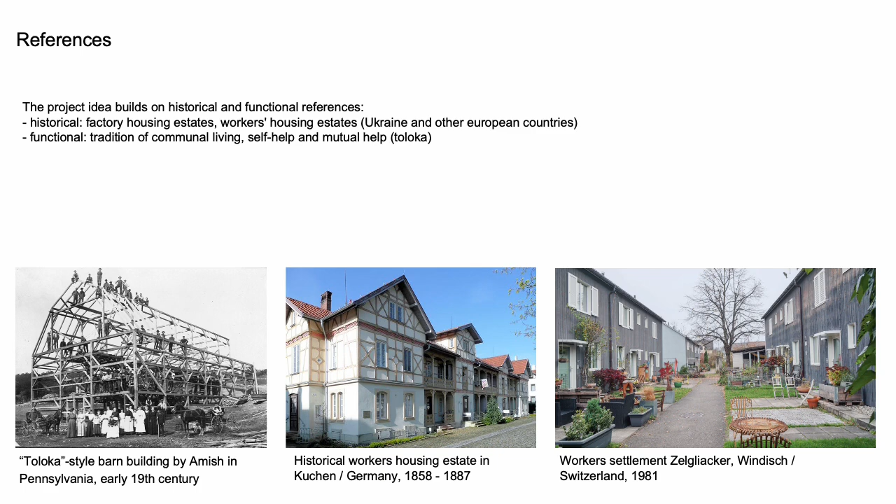There are numerous historical examples of both neighborhood assistance, Toloka, and the typology of the workers' housing estate, which have lost none of their relevance and which can make use of it. A contemporary solution should therefore build on the tried and tested recipes from the past on the one hand, while looking boldly to the future and opening up to new ideas on the other.

The following 5 innovations work together synergetically and go beyond the original goal of planning an ecological workers' housing estate, but are also absolutely necessary for achieving the goals set.

Innovation number 1: The model building as an incubator. Like a working model, it illustrates the material and spatial concept and offers space for future approaches. Future residents can use it as a trial home to experience the advantages of the unfamiliar materials. Their experiences should be scientifically monitored and used to test and further develop the concepts.

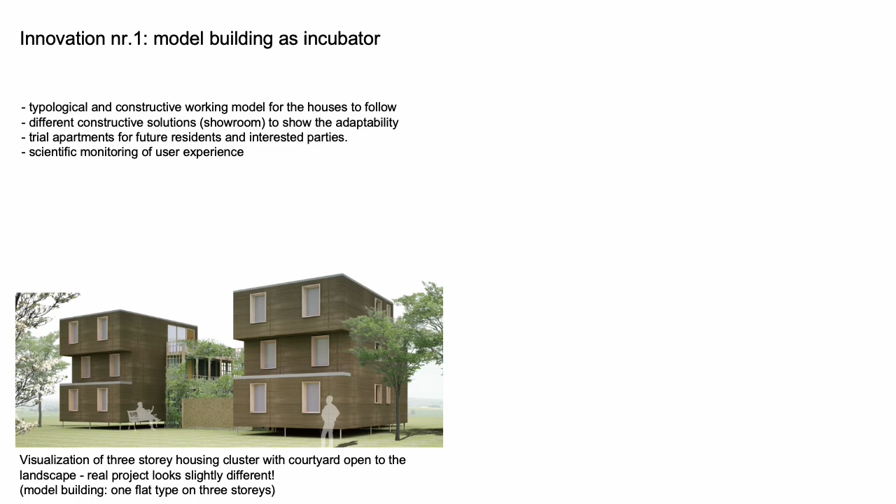Innovation number 2: The materials for the construction of the eco-housing are not to be purchased on the conventional market, but are to be produced from locally available natural resources in a factory or manufactory to be built on site.

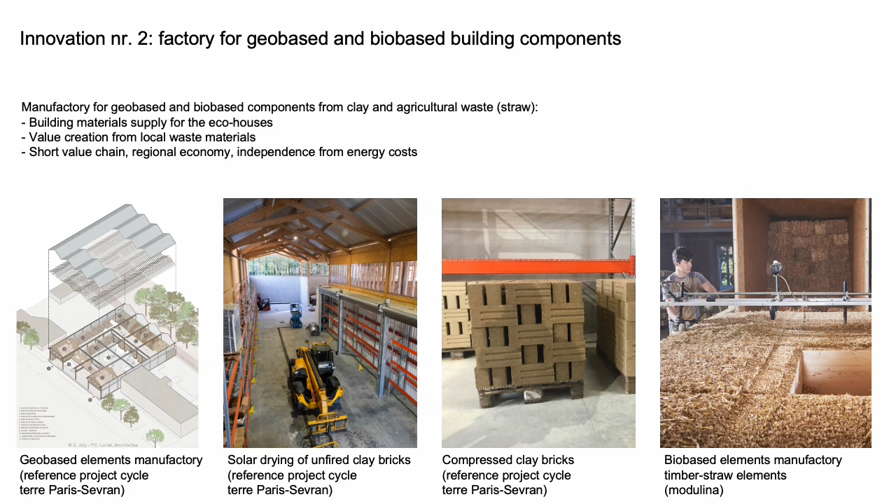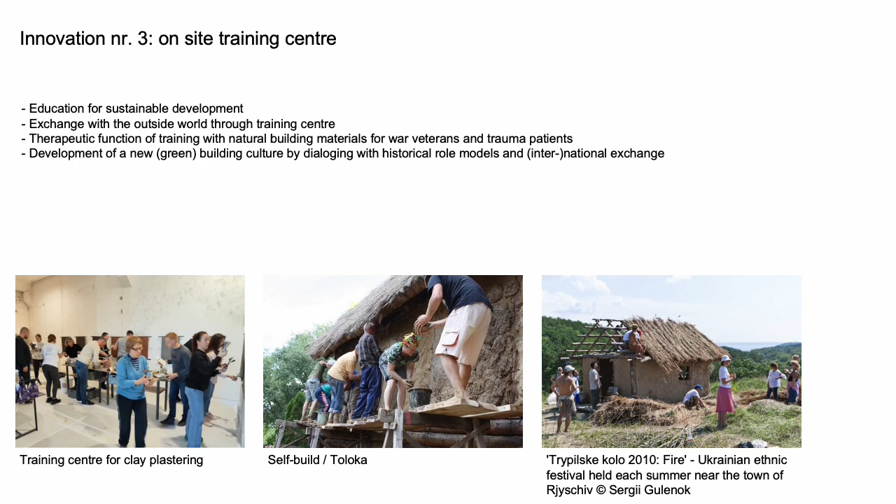Innovation number 3: The handling of the unfamiliar building materials is to be taught in a training center to be created on site for craftsmen, future residents, and other interested parties.

Innovation number 4: When selecting technical solutions, systematic attention is paid to their recyclability and resilience. The reuse of components is practiced in repair workshops and promoted through exchange platforms.

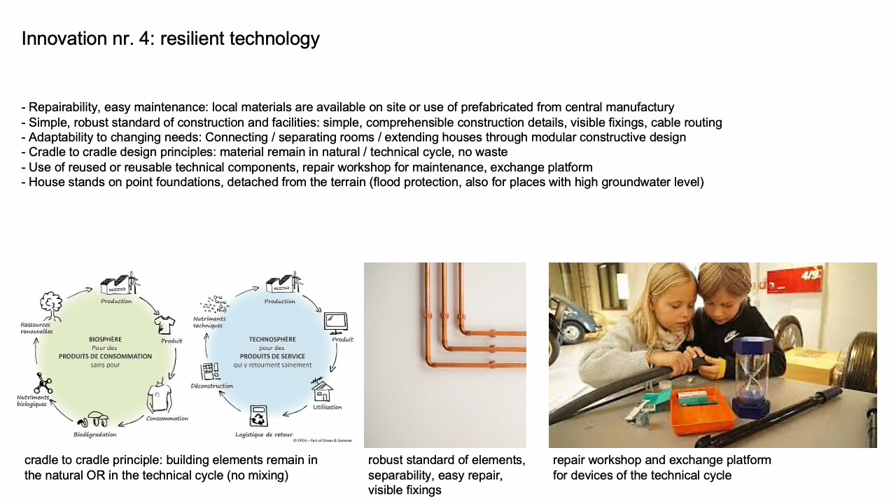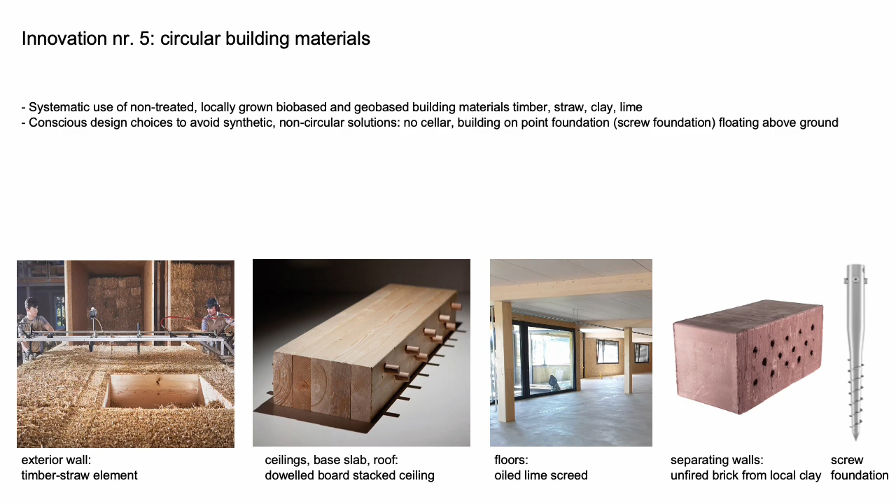Innovation number 5: Conscious design decisions, such as not building a cellar, create the conditions for the consistent use of untreated, locally available and recyclable natural materials.

The architectural and structural concept is designed to be versatile and adaptable to changing needs. The layout of the rooms allows for both social interaction and private retreat. The flats are accessed from the courtyard via the pergolas. Generous room sequences go hand in hand with efficient spatial organization.

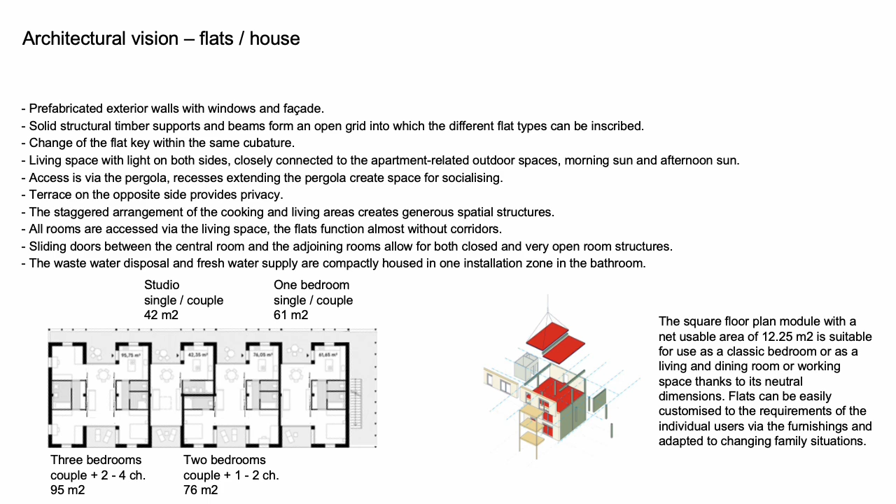3 three-story buildings are arranged around a shared courtyard which is bordered by a single-story communal building. This offers space for the shared use of resources, storage space, laundry room, guest room, workshop, etc., and enables a reduction in the size of the flats without any loss of comfort. This concept also includes a variety of green outdoor spaces for an attractive extension of the living space.

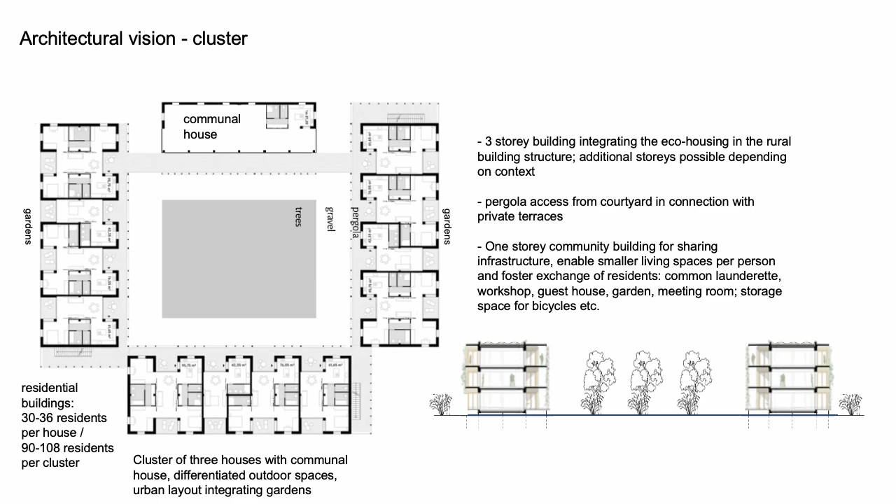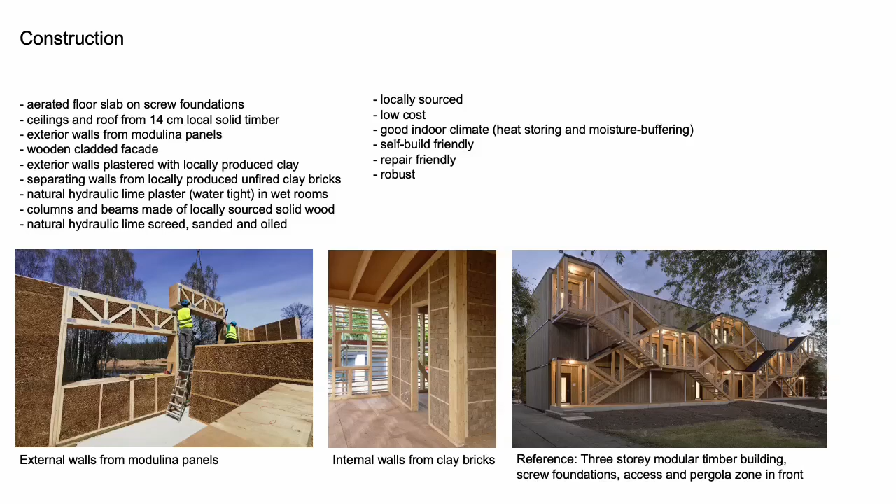Only locally available materials are used for the construction: clay, wood, straw and lime. The construction is cost-effective, easy to build yourself, easy to repair, robust, and it promises a healthy indoor climate and the best possible eco-efficiency. The walls and ceilings are prefabricated and joined together to form a rain-proof building envelope within a very short time.

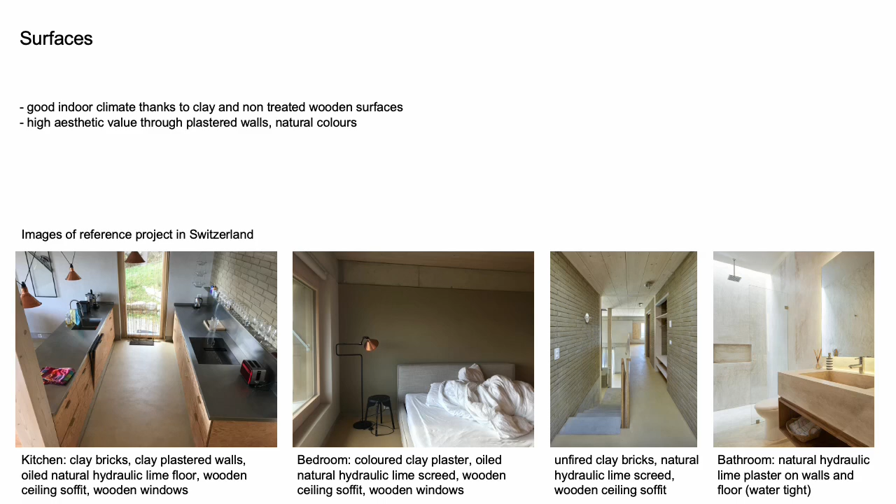The fit-out is carried out in collaboration with the future residents. The largely untreated surfaces made from natural materials are of high aesthetic and craftsmanship quality. They consist exclusively of wood, clay and lime.

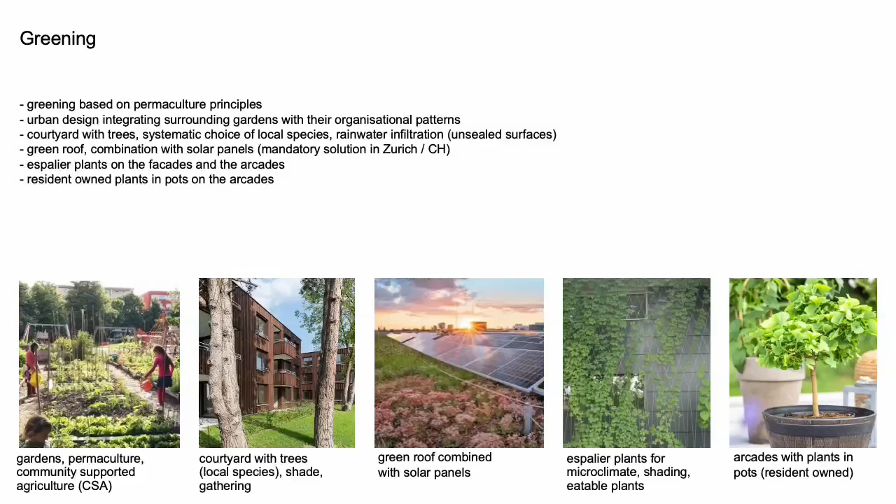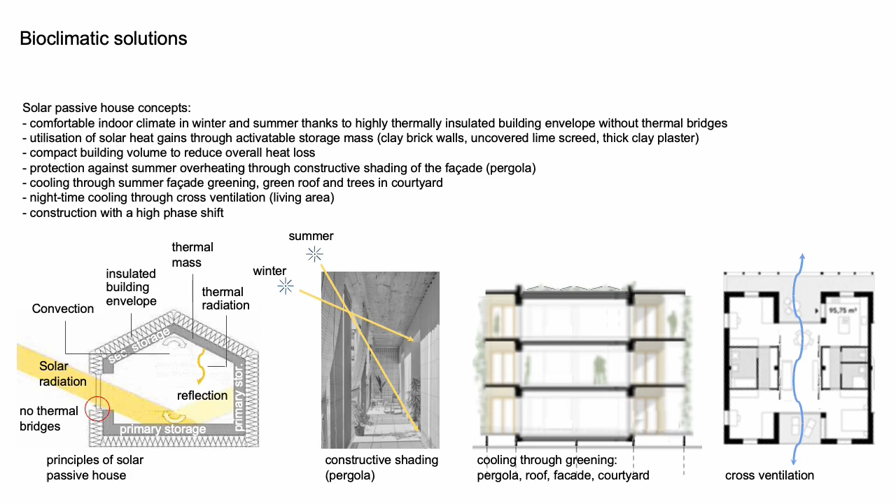The greening fulfills both ecological and social objectives. They are simple, tried and tested solutions with multiple benefits. The bioclimatic architecture and the consistently applied passive solar concepts enable an optimal indoor climate with simple design solutions that support each other.

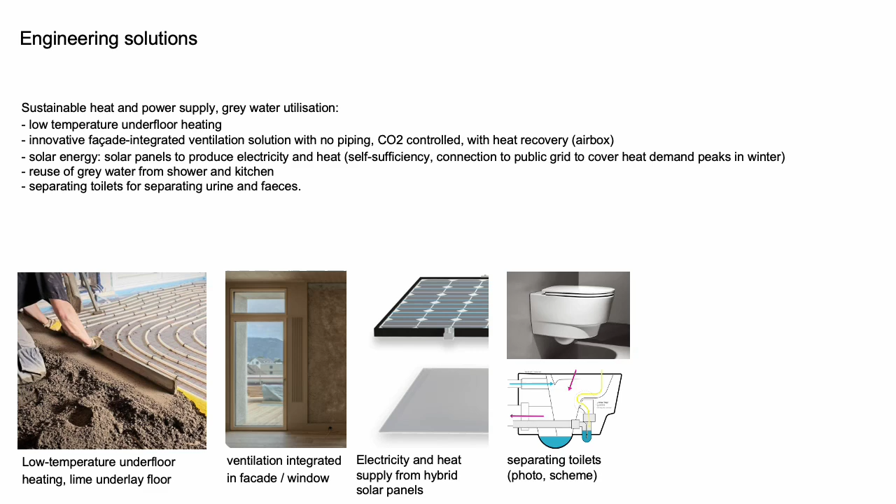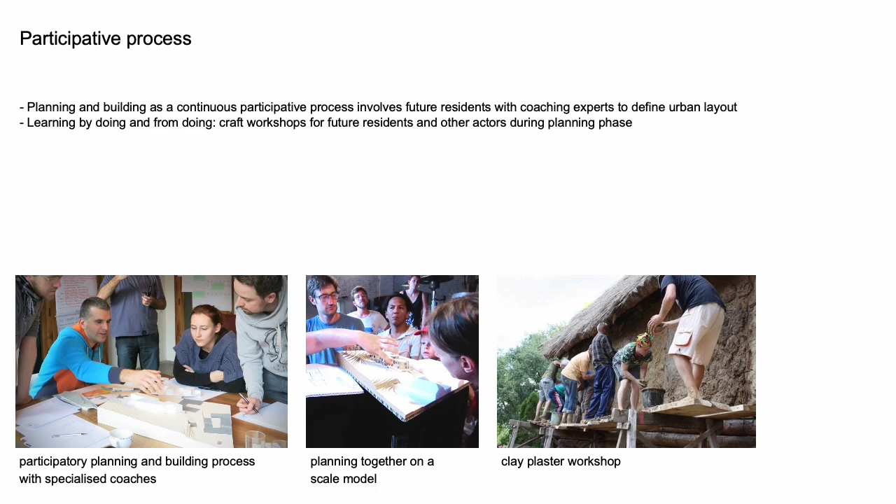The carefully selected and tried and tested solutions for building technology enable the efficient utilization of available resources. The involvement of future residents in the planning and construction process promotes identification with the living space. The exchange between lay people and experts enables mutual learning. Social interaction and the need for privacy are equally supported by the spatial concept.

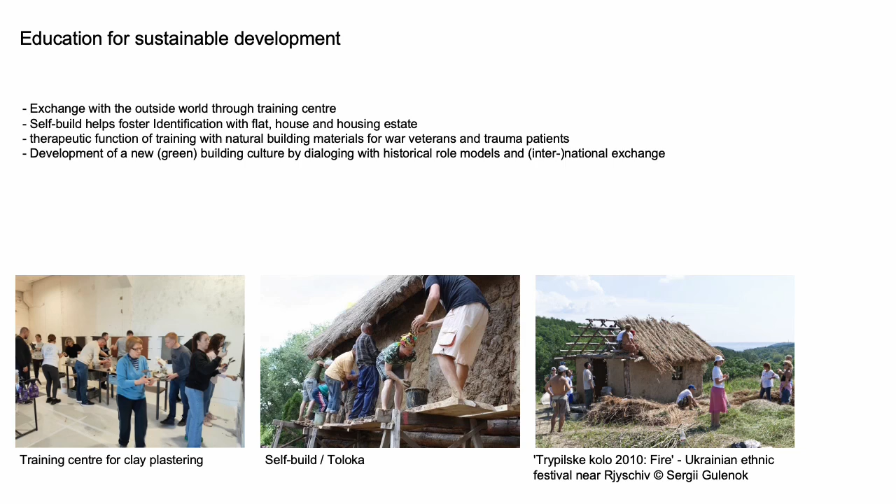The concept of Toloka can be experienced in a variety of practical ways. Building together can also fulfill a therapeutic function. The aim is to create a new green building culture.

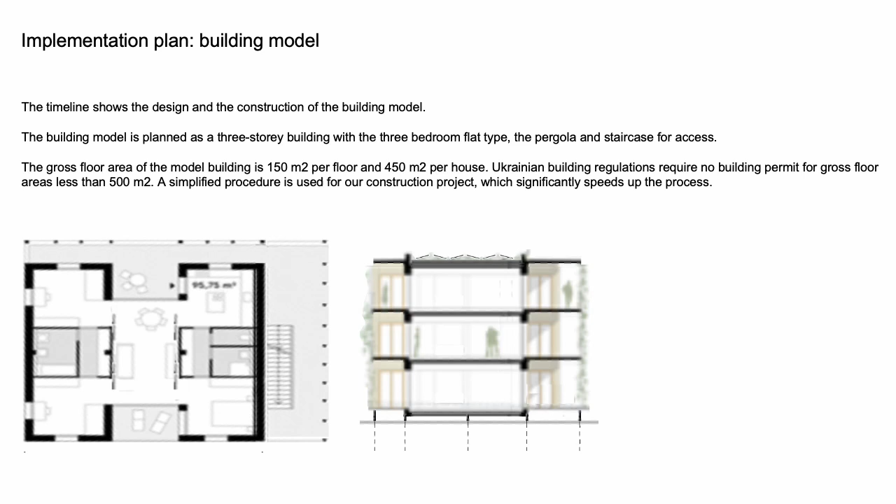The following timeline with milestones shows the realization process of the model building in detail. An extendable section of the proposed 3-story building is to be built. The largest flat type with 3 bedrooms will be stacked on top of each other and supplemented with a pergola and the external staircase. By limiting the gross floor area to less than 500 square meters, the approval process is significantly simplified.

The Toloka team came together ad hoc for the Rebuild Green Hackathon. Their experience and roles complemented each other perfectly when developing the project proposal. We would like to rely on selected partners for the realization in order to meet the budget and time horizon.

Financing has both a conceptual and an operational level. Cost effectiveness is achieved through a range of targeted and sometimes novel strategies.

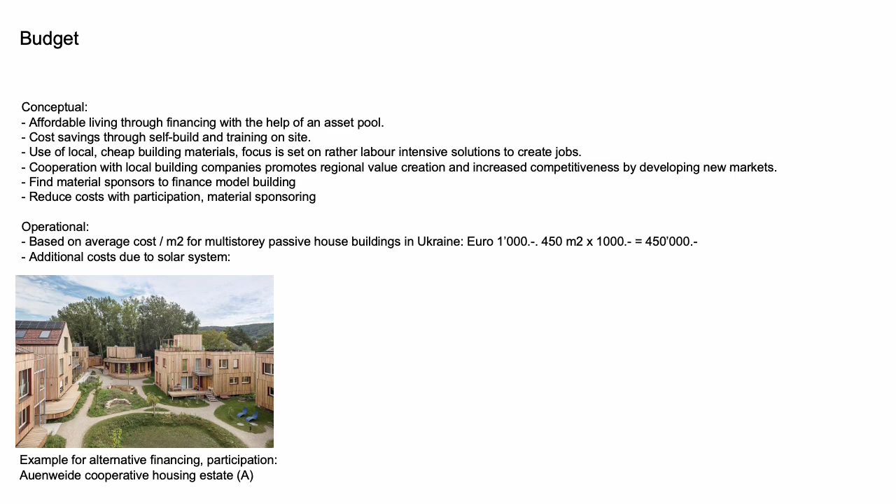We estimate the cost based on average values for the construction of passive houses in Ukraine at €1,000 per square meter. This results in a total cost of €450,000 for the model building. This sum can be significantly reduced through self-construction and material sponsoring.

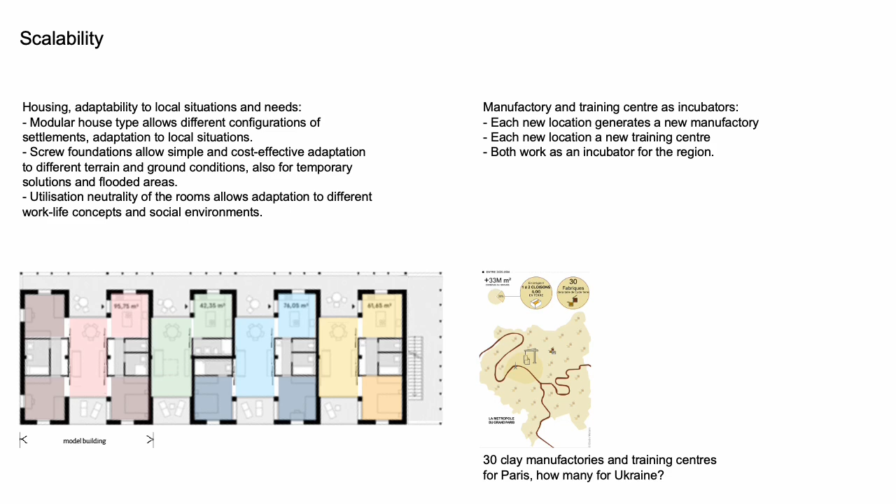The scalability of the pilot project is ensured by a series of spatial, constructive and organizational strategies. An integral part of our proposal for the creation of an eco-settlement, eco-housing, is the component factory and the training center. Both act as an incubator for the surrounding region of the respective construction project.

Let's summarize our proposal and look at the next steps. We have developed a realistic solution for the Prometey eco-housing. We are optimizing the use of local sustainable resources in a synergetic and innovative way.

We are making use of historical and functional references and participation models. We have illustrated our proposal with a detailed project for a model building. We have shown that a model building can be realized within the project period of 1 year.

Now it's time to put up the detailed budget. We will complement our project team with partners for whom we have defined specific responsibilities. For scaling up and spreading the project idea, we are proposing training centers and component factories together with partners.

We conceived the model building as an incubator in the creation of new neighborhoods. We are starting a series of participatory events to accompany and reflect on the planning and construction process.